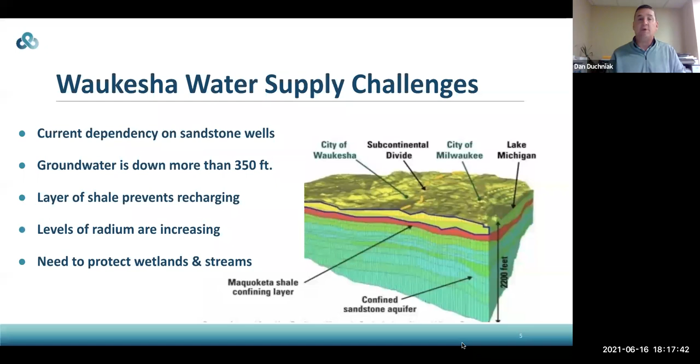So what did we do? The city of Waukesha researched over 20 years and looked at more than 14 different alternatives. We completed an environmental impact statement with the State Department of Natural Resources, and came to the conclusion that the only reasonable water supply for the city of Waukesha was a Great Lakes or Lake Michigan alternative. It is sustainable for the future, protective of the environment, and the best solution for all of the ratepayers, both in the city of Milwaukee and the city of Waukesha.

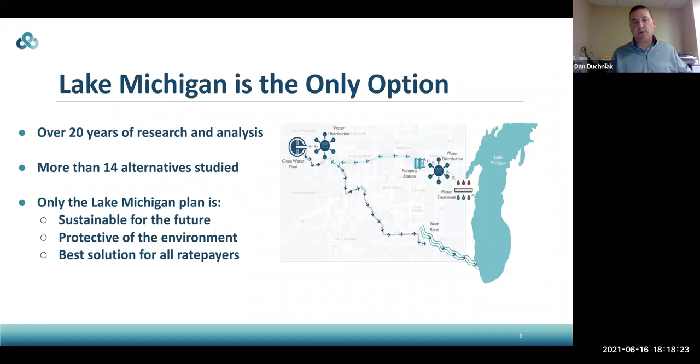So how did we get there? The first phase was to work through an environmental impact statement. We worked with the Department of Natural Resources to analyze all of the alternatives in depth. This took about 5 years. There were 23 additional technical memoranda, and this document is over 3,000 pages in length. So we worked with the DNR to get approval.

Once the DNR approved it, they told the Great Lakes Compact that they believed we had an approvable diversion application, because the city of Waukesha sits outside of the Great Lakes Basin, the natural drainage for the Great Lakes Basin. So when rain falls, if it flows into Lake Michigan, that would be the surface water area for Lake Michigan, and if it flows to the west to the Mississippi, that would be the Mississippi River Basin.

Since we were completely outside of the Lake Michigan drainage basin, we needed to get unanimous approval from the Great Lakes Compact Council. The DNR submitted the application and our environmental impact statement. We worked through about a 6-month process with the Great Lakes Compact Council, which includes a representative of all of the Great Lakes states and the 2 Canadian provinces. A couple of them provided technical reviews of our application. All of them submitted questions, and the application was scrutinized by the 7 other Great Lakes states outside of Wisconsin, and then the 2 provinces. On June 21st of 2016, 5 years ago yesterday, they gave us approval to receive Great Lakes water from Lake Michigan.

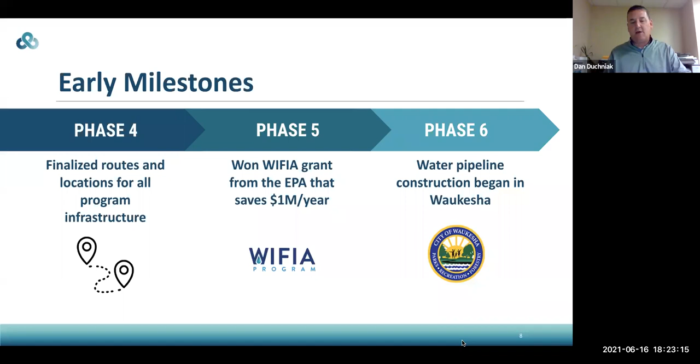Now we move to phase 6 where we're under construction. And with that, I'm going to turn it over to Katie, who will talk to you about the route and the communications you can expect from the team here in Waukesha. So Katie, it's all you.

Thank you, Dan. So thank you everyone for joining us today. I'm going to talk a little bit about both pipeline routes, both the pipeline that goes from the water supply and the return flow pipeline. You can see both of these routes on our website at greatwateralliance.com, in the in your area section, searching for the route.

The first pipeline I'll give a high level overview of is the water supply pipeline. This is the pipeline you'll likely see construction for in your neighborhood. It's taking water from a booster pumping station located in the vicinity of 74th and Oklahoma in Milwaukee to the booster pumping station located in the city of Waukesha. This pipeline is going to go through West Allis, the city of Greenfield, the city of New Berlin, and then also through parts of Waukesha. There's a booster pumping station site in Waukesha.

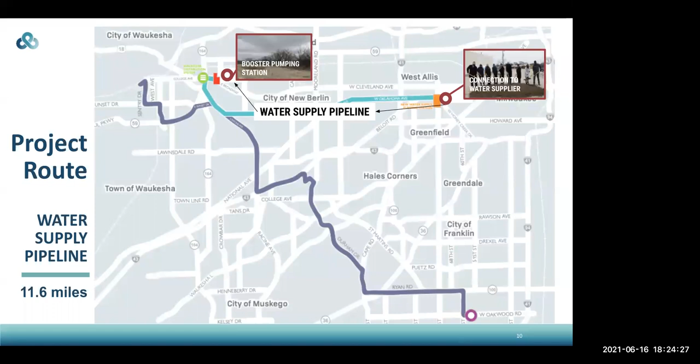There's also some storage facilities that will be built, and then the pipeline will connect into Waukesha's distribution system. From there, the water gets used by the residents and businesses in the city of Waukesha, and it gets cleaned at the clean water plant and treated to a tertiary level. It's then pumped through the city of Waukesha, the village of Waukesha, the city of Muskego, the city of New Berlin, the city of Franklin, to the Root River, located in the city of Franklin.

And from there, the water flows through the Root River back out to Lake Michigan. That pipeline is about 23 miles. Again, both of these you can get more detail on the website, the Great Water Alliance website, looking for the route.

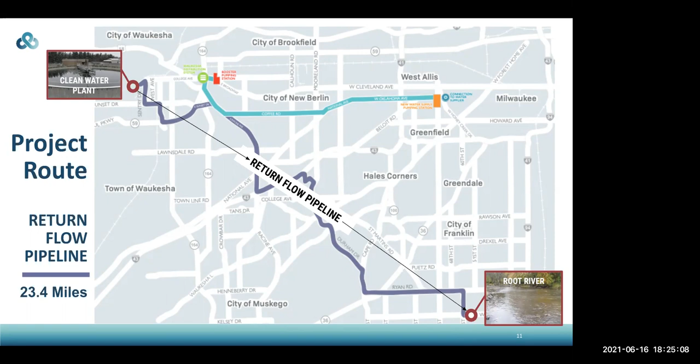You might be asking, why is a return flow line needed? As Dan mentioned, this project needed a compact council approval. Because of where the city of Waukesha is situated over the subcontinental divide, it is required to use Lake Michigan water that the volume used gets returned back to Lake Michigan to have a net zero impact on the lake levels. So this actually turns out to be beneficial in a number of ways.

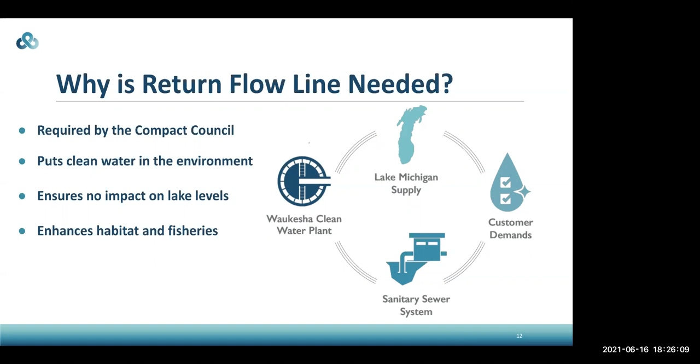Besides that net zero impact on the lake level, we're taking tertiary treatment from the clean water plant and putting it into the Root River. This is enhancing the habitat and providing flow augmentation, or extra water, in an area of the Root River that has a low base flow. This is going to add about 6 inches of base flow to the Root River during normal times, which will allow fish to spawn farther upstream, which is beneficial to their reproduction systems. So this is going to have a benefit, and again, that net zero impact on the lake level.

As Dan mentioned, at the middle of 2020, we started going from the permitting and design phase into the construction phase. Pipeline construction started with the return flow pipeline, beginning at the Waukesha Clean Water Plant, and has continued through the city of Waukesha, the village of Waukesha, and into New Berlin. In 2021, we're still working in the New Berlin area. We've had some work go into West Allis and Greenfield, and we'll start moving into the Milwaukee area later this year, which is why we're having this open house now, so you have access to the information. We anticipate both sections of the return flow pipeline and the water supply pipeline being completed in 2022.

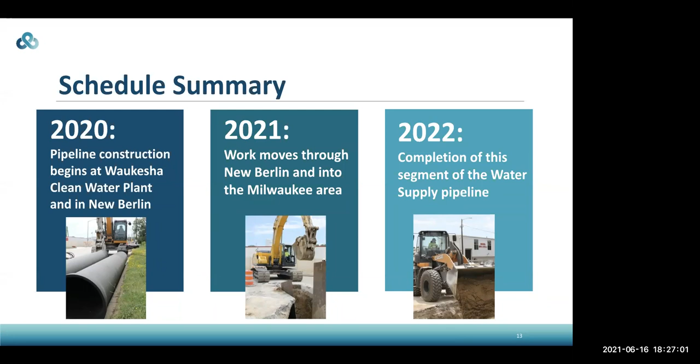The Great Water Alliance website really is where we have a ton of information that can be useful as you're dealing with the inconvenience of this pipeline construction. One of the best spots for information is the route map. It has an interactive component — you'll be able to see construction markers where there's currently construction happening. They're color coded to let you know if it's open cut construction or trenchless construction, which Jeff will explain in more detail. If you click on those icons, they'll have pop-ups about the construction happening in that area, including timing, any associated detours, and what's occurring in the vicinity of that icon.

In the 'your area' section of the webpage, there's a section devoted just to Milwaukee. On that tab, you can sign up for construction email updates. Those updates happen about every week or two and provide information on where the work is happening, what type of detours there are associated with it, and timing information. So if you don't want to check the website regularly, you can sign up for the construction email and have that information delivered to your inbox. We'll also post those construction updates in the Milwaukee area section, so if you don't want to use the map, you can find timing information there, along with any relevant detour maps.

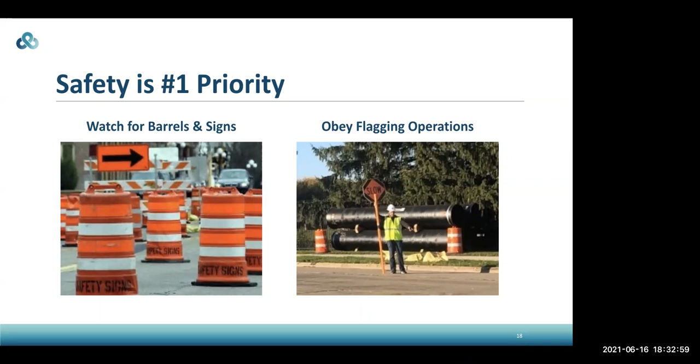And with that, I'm going to turn it over to Jeff, the construction manager, to talk through a bit more detail of the construction and what to expect.

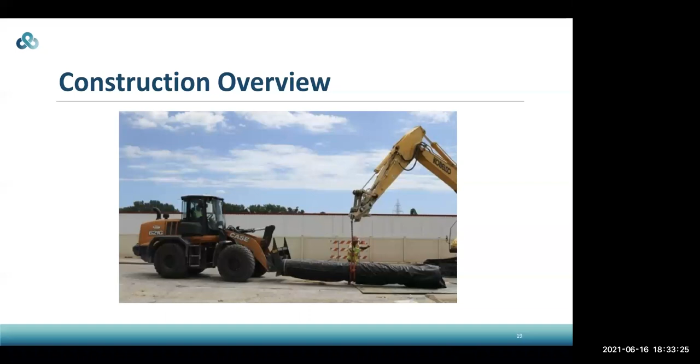Thank you, Katie. What I'm going to cover today is a brief overview of the construction and routes and what to expect during construction, just so there aren't any surprises. The construction route in general goes from I-41 all the way to 76th Street, and we do cross the Honey Creek drainage ditch just east of 76th Street, where the supply pump station will be built.

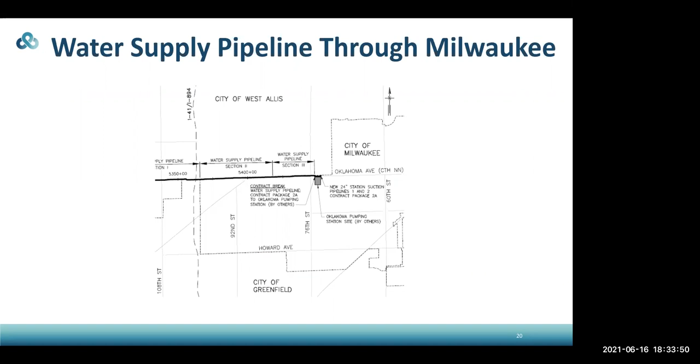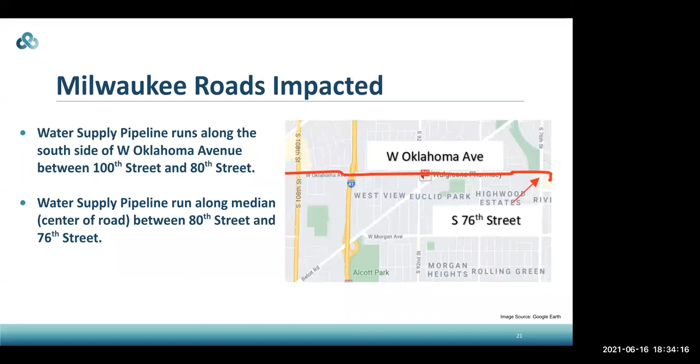The Milwaukee Road impacts — next slide. In general, the water supply pipeline runs along the south side of West Oklahoma from 100th Street to approximately 80th Street. There at 80th Street, we cross over and run more towards the center of the road near the median from 80th to 76th Street.

A couple of locations where we'll be working — this shows highlighted intersections where some of the activities will be taking place, and some specifics where special attention will be used for certain types of construction, which I'll discuss here in a moment.

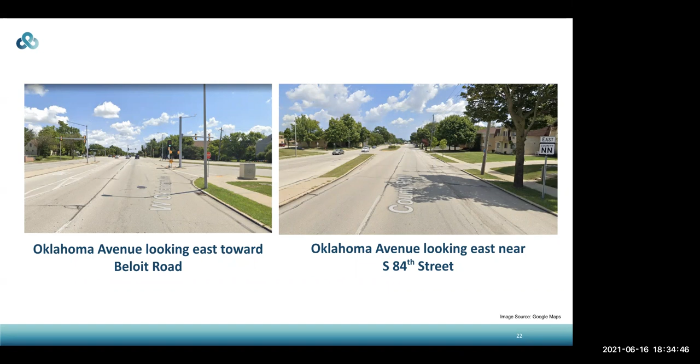At Oklahoma, looking east towards 76th Street, this is the location Katie mentioned where the pump station will be located. That pump station project will be addressed during another open house session hosted by Milwaukee Waterworks.

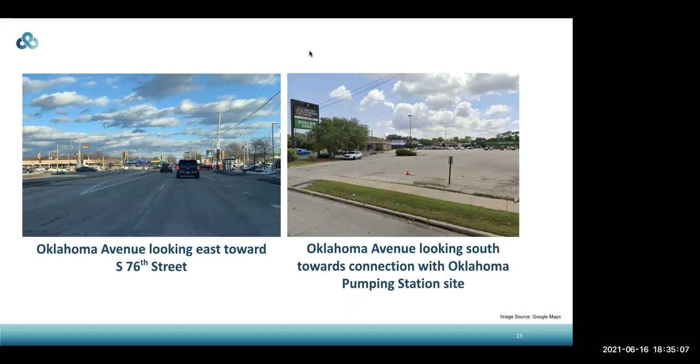The contractor we have for the job is Super Excavators. They went through a rigorous pre-qualification process along with competitive bidding and were determined to be the lowest responsible bidder for the job. They were awarded the job, and we've determined they are qualified, as their skill set includes sewer and water main installation, force main and pipeline installation, horizontal directional drilling and earthwork. So they're well qualified to perform this work, and they've done work in the area in the past, so they're familiar with traffic patterns and requirements.

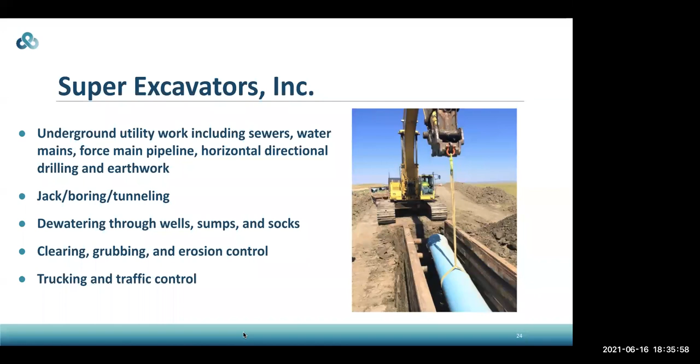Some of the special technologies being used for this project are trenchless technologies. You will hear keywords like jack and bore or horizontal directional drilling as a general topic. Horizontal directional drilling through some of the sensitive intersections highlighted earlier will be done mainly to keep traffic moving, flow through intersections, sensitive areas, and around sensitive utilities.

During trenchless technologies, it may appear that work is moving slowly. Some of these crossings may take 4, 6, up to maybe 8 weeks, depending on the length and complexity of the crossing. So be aware that we may be staged in one area for a duration, but also be aware that we are trying to move in the most efficient and productive manner that we can.

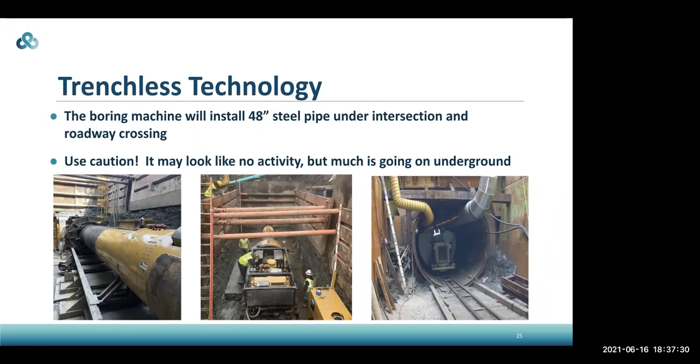Like Katie said, there's a lot of activity around these work zones, so just be aware that safety is a priority for the general public. If you're interested, please feel free to contact one of us, and we'd be more than happy to answer any questions.

Notification processes - Katie did touch on this a little bit earlier. The door hangers that will be distributed during construction need to be put in a visible, legal location. They cannot be placed in mailboxes, side doors, back doors, or hung on fences. They need to be on a main door in a visible location. So if that's a door you don't use very often, while construction is near your area you may want to pay closer attention to that particular door, just so you're getting the notifications appropriately.

Notifications are handed out on specific timeframes: 14 days prior to any street closures or when the contractor is approaching an area. They will start distributing these notifications 14 days in advance of getting into that area. They have general information on who to contact, what to expect, and the type of work that's going to be happening in the area.

3 days prior to any restricted property access or other restrictions for service impacts, you'll get another notification with more general information about that restriction. Then one day prior to the specific outage or restriction, you'll get a third notification that gives you more detailed information and detailed timing on what to expect.